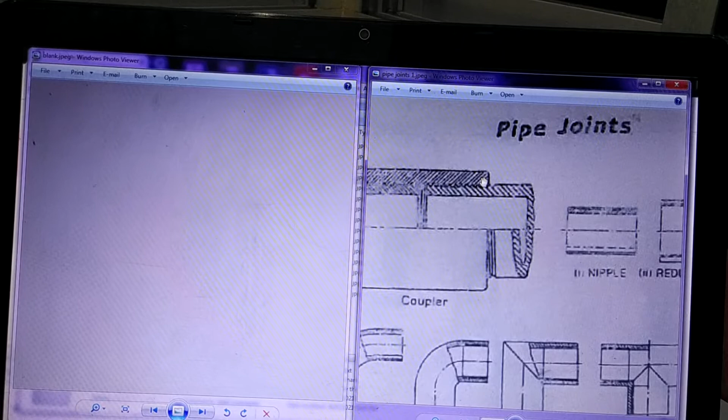Welcome everybody. Today's topic is pipe joints. It is freehand work. Today we are preparing freehand work on pipe joints, from practice sheet number 6.

Now let us see what these pipe joints are and what we are going to learn. There are different types of pipe joints shown, and we will see their function. You must have seen these many times, but today we will see what they are called and how they function. The main objective of these pipe joints is to connect two different pipes, and while connecting there are different situations.

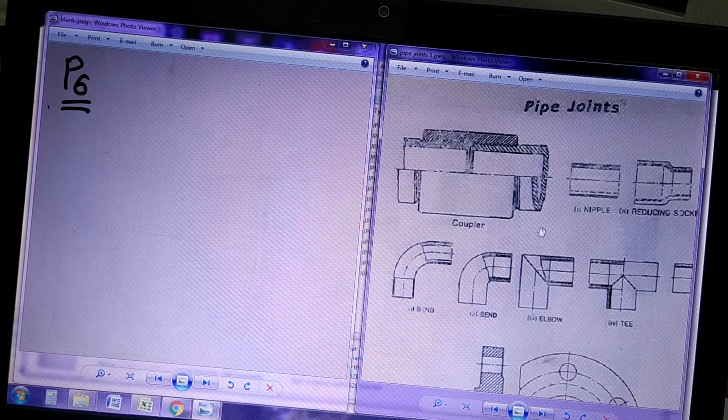These different situations are taken care of by different types of pipe joints. Sometimes two pipes are connected in a straight line just to extend the length. Sometimes two pipes are connected in a straight line but their sizes are different. Sometimes two pipes are connected at 90 degrees, forming a 90-degree angle. Sometimes the pipes are connected to form a T kind of joint, and so on.

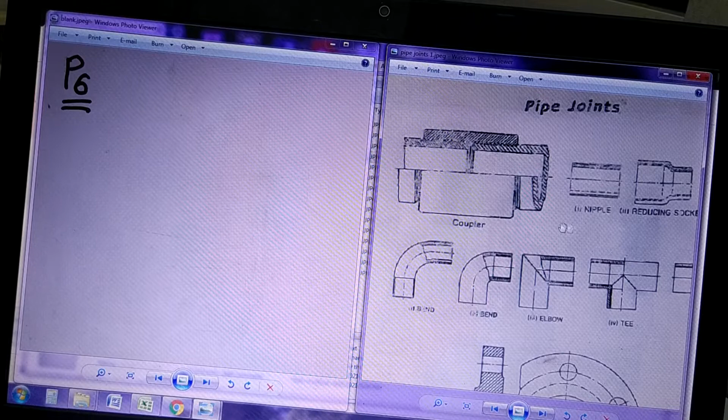So now let us see how this is done. These are simple pipe joints which you might come across in a domestic piping system. Now we start with the first one.

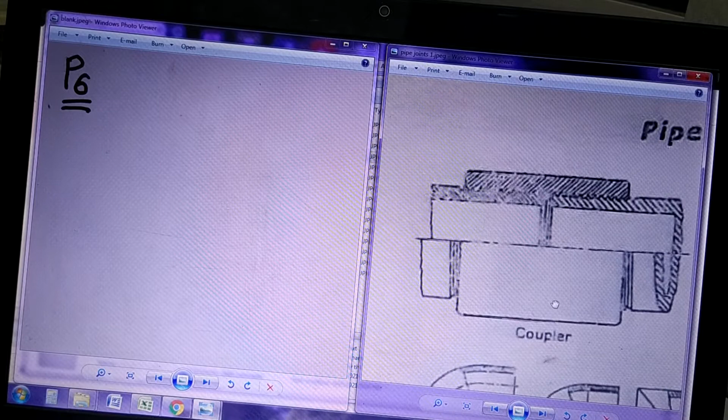This clarity is not there, but I will explain what it shows. It is shown in half section: the lower part below the center line is shown uncut, so that shows how it will be seen from outside. Then from inside, what you will see is shown here as a section.

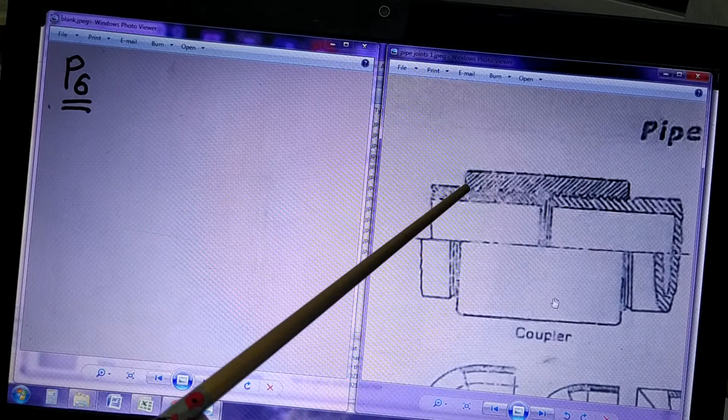Now how many parts are here? There are total 3 parts. This part is a pipe end coming from the left side; this is the end of the pipe, it ends here, and on this side it can be of any length. This is the second pipe, which ends here, and on this side it also has any length.

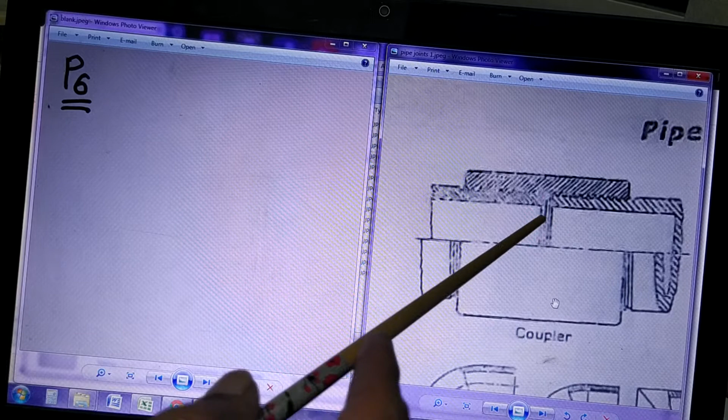Now these two pipe ends are brought together, brought near each other. As you can see clearly, because it is a section, the section lines are shown. You can also see the threading is shown here. Let me take it closer.

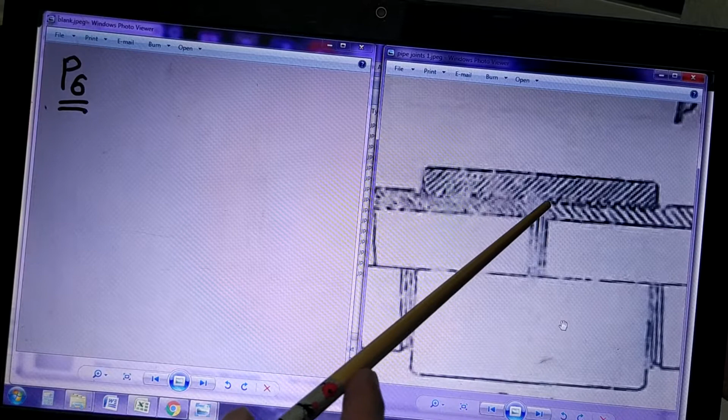The quality is not good, but follow my explanation to understand what it shows. This is the pipe diameter, and after that is the threading shown here till the end. Same thing on the other side - it's not clearly seen, but it is exactly the same, just the section lines are drawn of a different type. Again, this is a pipe of normal diameter, and after that there is threading.

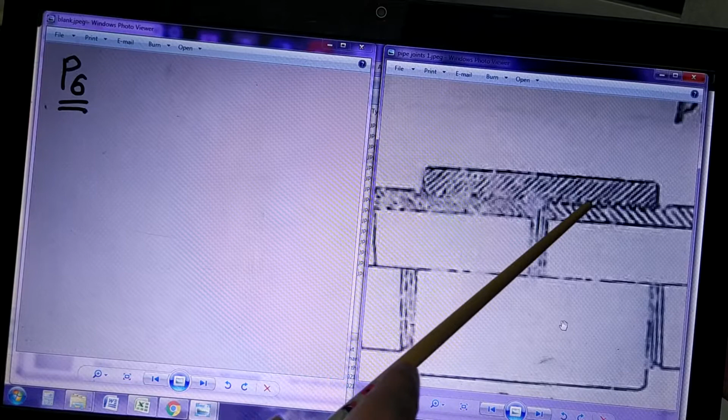Now these two threadings are of the same type, and they are from outside - they are called external threadings. This part is called a coupler, something like a hollow pipe. This coupler has threading from inside, and this internal threading engages with the external threading of this pipe. Same way, this part of the internal threading engages with the external threading of the other pipe. That means this internal threading is covering the external threadings of both pipes coming from the two sides.

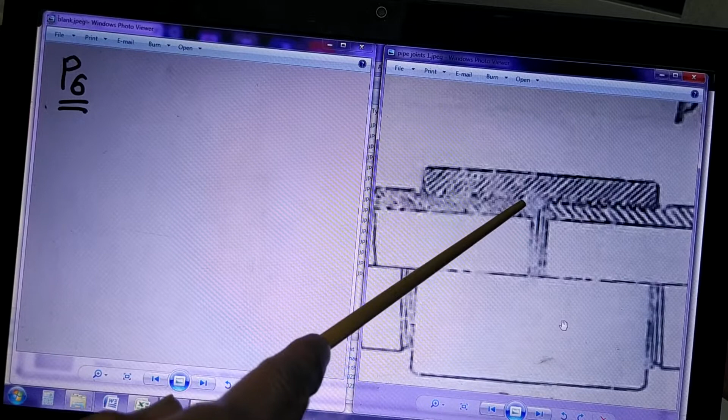So when you start rotating them, you will find that these pipes come closer to each other, and as a result a tight joint is formed. Sometimes between these two joints a gasket is put - some plastic or rubber gasket - to prevent leakage. Let me show you how it is shown.

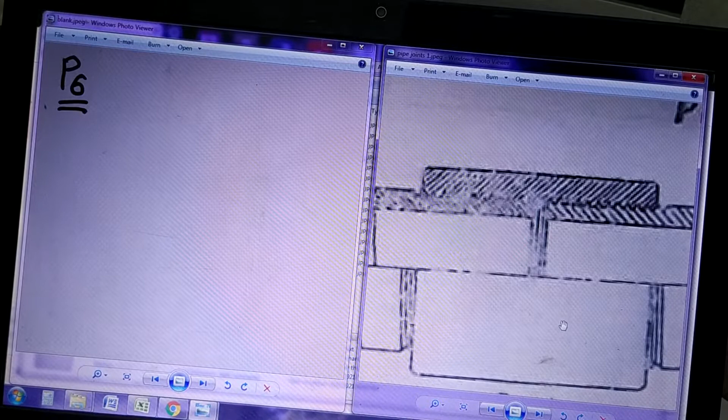This is one pipe, then this is the internal diameter, then there is a similar pipe on the other side, also with the internal diameter. So I have drawn two pipes. This is the center line, and I have drawn everything above the center line. Here you will find there is another part called a coupler, shown like this.

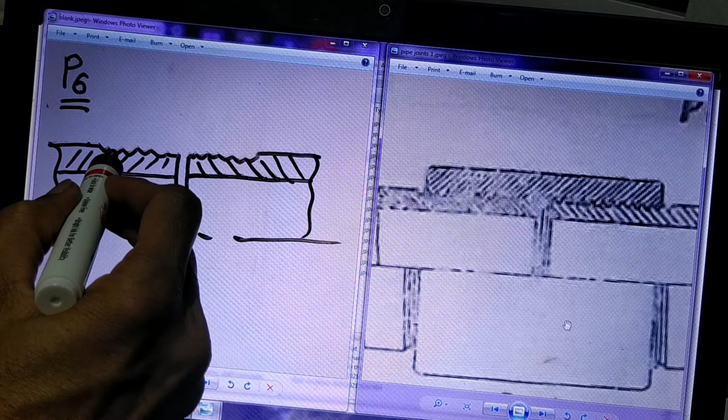It has got threading which is engaging with this threading. When you draw it, you show that it is matching - these serrations are matching. There is a section, and then between these two, at this place here...

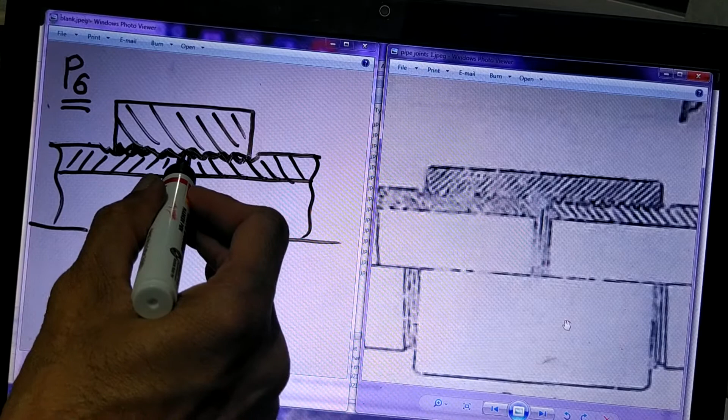Now what I have shown dark here is a rubber gasket. So when you are rotating this coupler, these threadings are brought together, and as a result the joint takes place when you rotate the coupler and rotate these ends of the pipe.

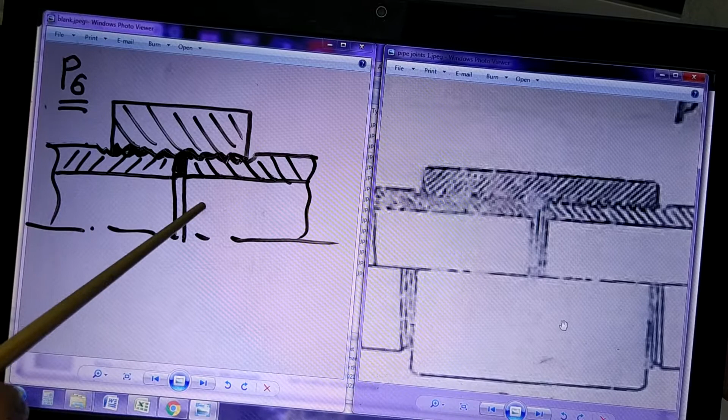That time the pipes move towards each other and they are pressing this rubber gasket, and the joint is formed. So this coupler, what is shown here, is called a coupler. It is working like this, and this is a figure which you can draw.

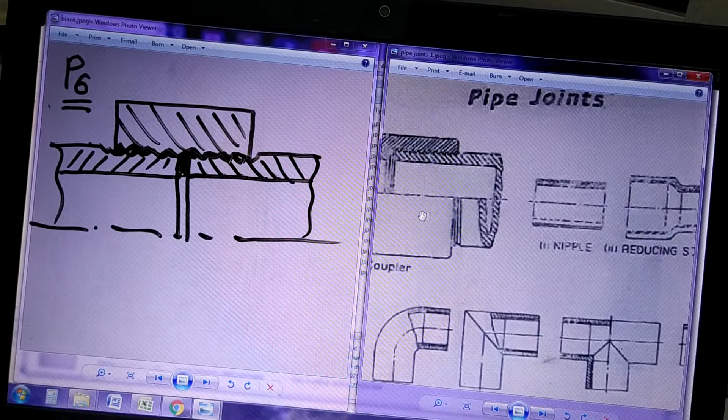Having seen this, a similar arrangement is done in different ways. The next part is called a nipple. This is a small piece of pipe only, used for connecting two pipes, but it remains inside the pipe. On this piece of pipe, the threading is on the outside.

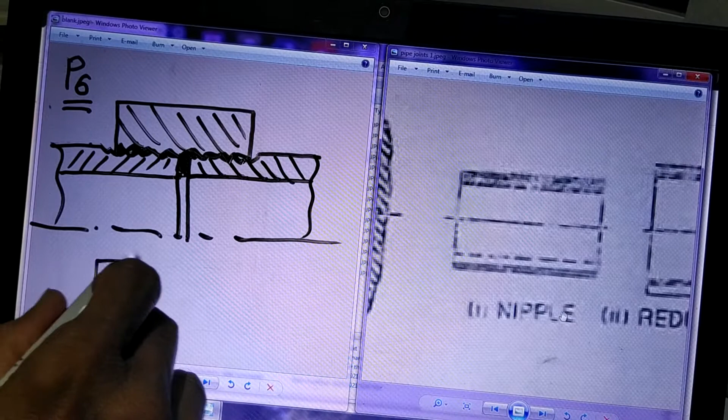So if I draw, this is a pipe and here there is threading, and this is a section of the pipe. Because it is a section, I have shown the section lines. So this is how the nipple is. The threading is on the outer side. This is a connector, just like a coupler - this is a nipple.

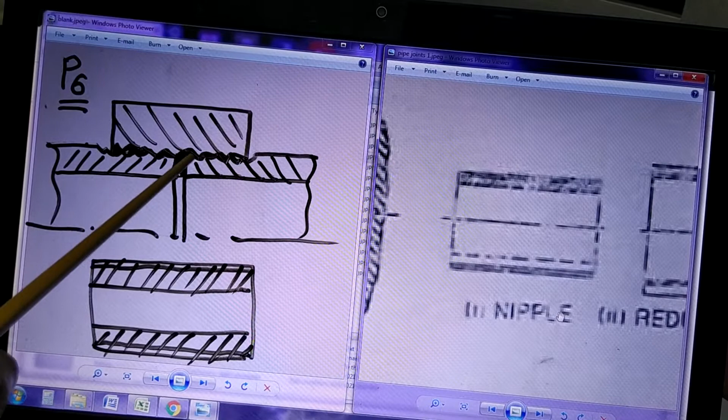Coupler and nipple are doing the same work - they are joining the two pipes. But in the case of a coupler, it is joining the two pipes from outside because it has threads from inside. Whereas the nipple is joining the two pipes from inside because it has threads on the outside.

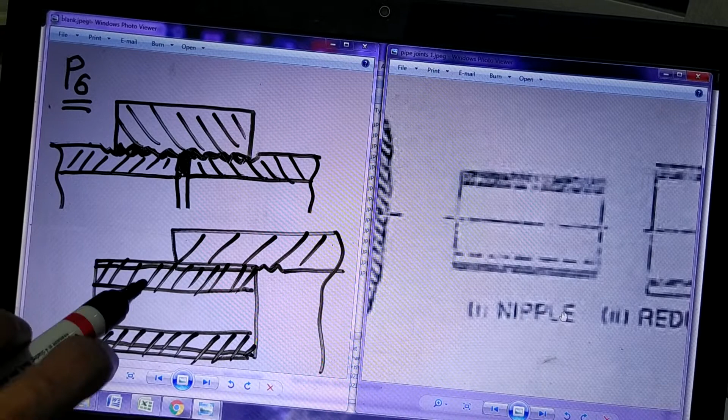So where is the pipe here? In this example, the pipe is from outside. Now what I have drawn is a pipe. This is one pipe, it has got internal threading. This internal threading is matching with this threading. Then on the other side, again there is a pipe.

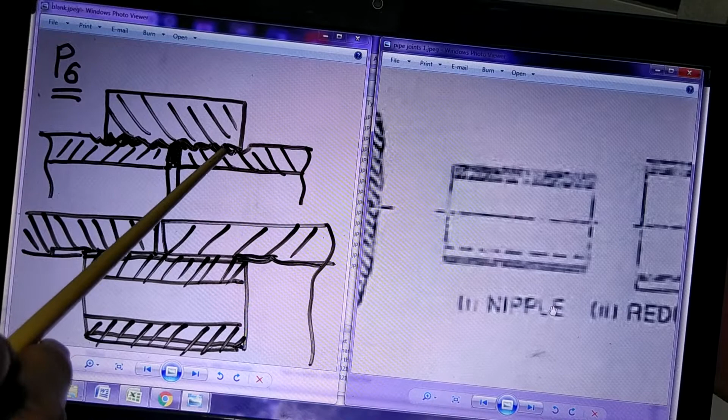Like this - in fact I should not show it like this, it is to be shown by double lines. See, this is one way of showing the threading. By actual convention, the serrations of the threading are shown like this. So this and this convention are different. Here the threading is shown by V-like shapes, but here it is shown by a double line - double line is the convention for showing threads.

Now this double line threading, for the nipple it is from outside, for the pipe it is from inside. One pipe, second pipe, and then the internal threading of the pipe is matching with the external threading of this nipple.

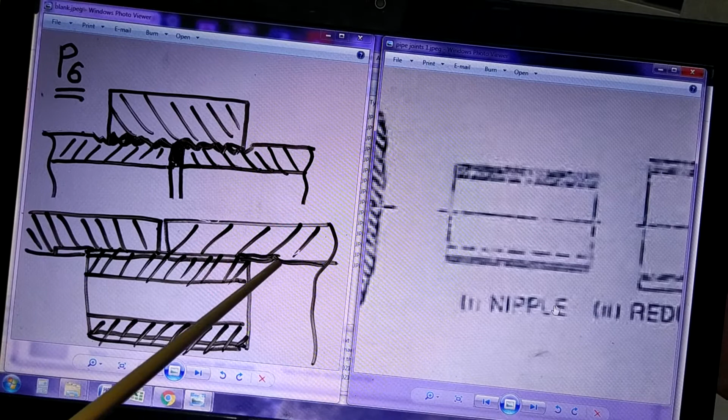Now in this case, outside the pipe there is no extra projection, it is all in one level, whereas here, inside, the flowing liquid has got an obstruction because of this nipple - because this is the original diameter of the pipe, and this is the diameter because of the nipple. So the liquid that is flowing has to get slightly diverted like this, and this is causing some kind of obstruction. So this could be a disadvantage, but the advantage is that from outside the two pipes are in one level.

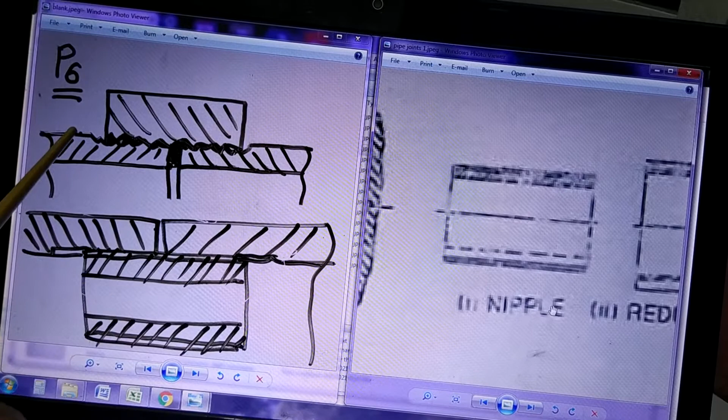Compared to here, where the coupler is there - the outline of the pipes gets disturbed and this extra projection is created on the outside. So sometimes this might be a problem, whereas this is a disadvantage here - the disadvantage is that it is obstructing the flow. So coupler here and nipple here, both are serving the same purpose of joining the two pipes.

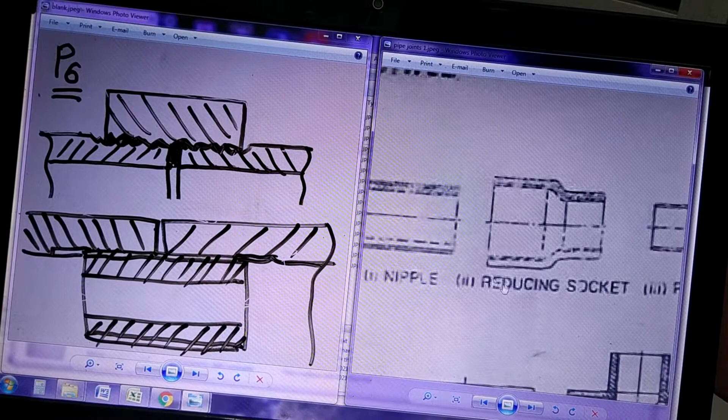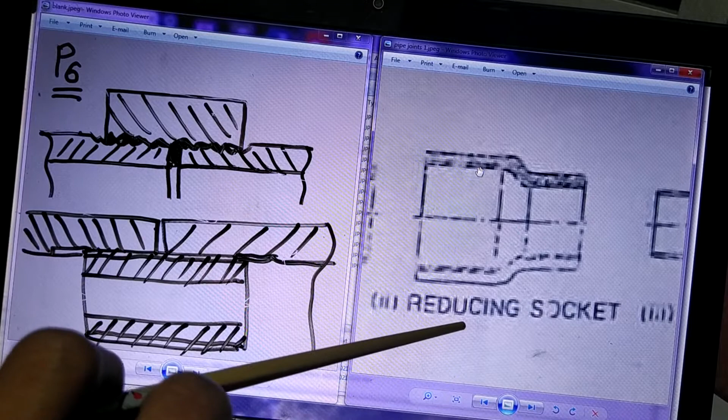Now you can see here again, there is a reducing socket, it is called. Here, the threading is from inside, and this again is a connector, so you can call this a kind of coupler only. This is a coupler, and this also is a coupler because it has got threading from inside. But the difference here is that it is called a reducing socket, not a coupler. Although it is a kind of coupler, it is called a socket - a reducing socket.

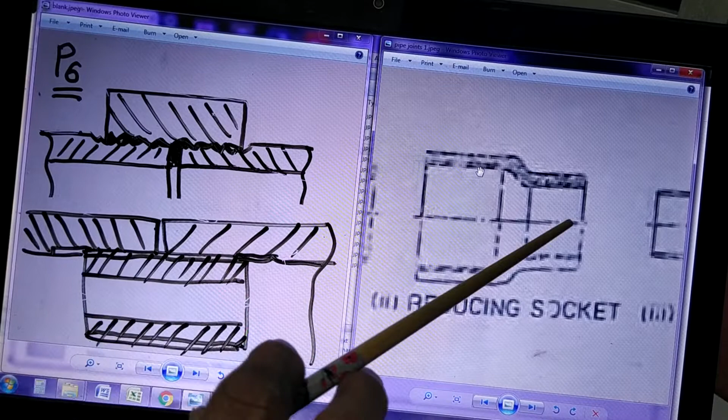Reducing means you can see here the diameter is different, here the diameter is different. That means the two pipes which you are connecting are going to be of different diameter. Here the two pipes are of same diameter. Here the two pipes which are going to be connected will be of different diameter. Now here the pipes are not shown, only the reducing socket is shown, and the internal threading is shown by double lines.

Now again the same thing, half shown. This half part is not shown in section, this part is shown in section. So because this is shown in section, when you draw it, something similar here. That means you are going to draw section lines here all over, and you are going to draw double lines at these two places. So double lines will end here, these double lines will end here. That's why this line has come.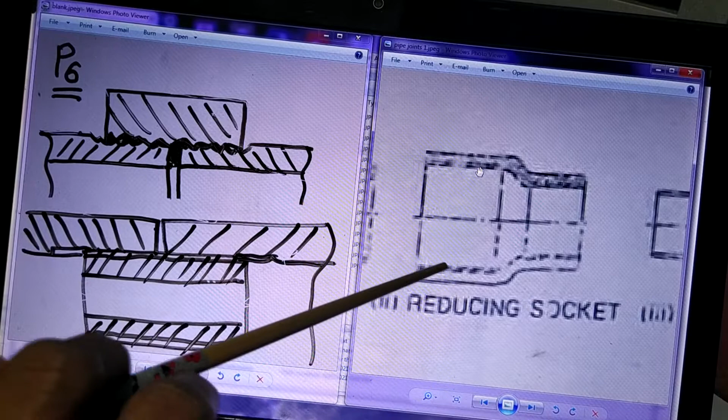And on this side, it is not shown in section. Instead of that, it is shown by dotted lines. So the double lines are shown by dotted lines like this. This is also shown by dotted lines, because this is not cut, this is cut. Only upper half is cut. So this is reducing socket used for connecting two pipes of different diameters. And it is connecting from outside. It has got threading from inside.

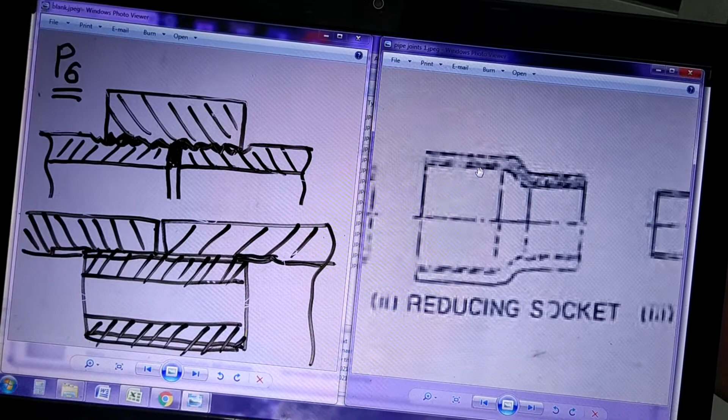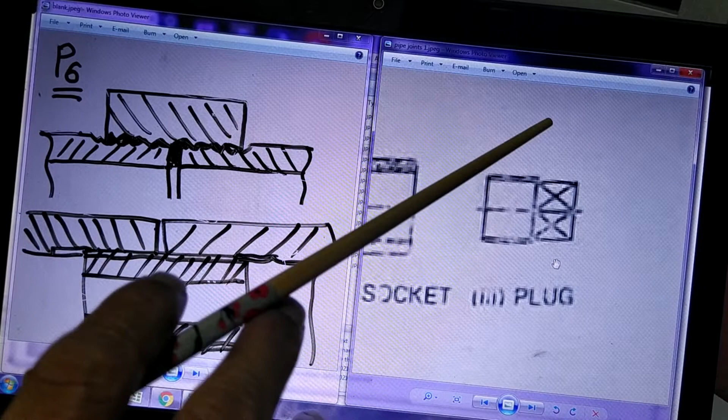Now the next part is called as a plug. This plug is a solid part. First of all, the meaning of plug is, it is for the purpose of blocking the pipe. Sometimes the pipe end is containing liquid, and we don't want that liquid to flow further away. We want the end of the pipe to be closed. So when you want to close the end of the pipe, this plug is used. As the name suggests, plug means it is plugging the pipe, it is blocking the pipe. It is stopping the liquid from flowing.

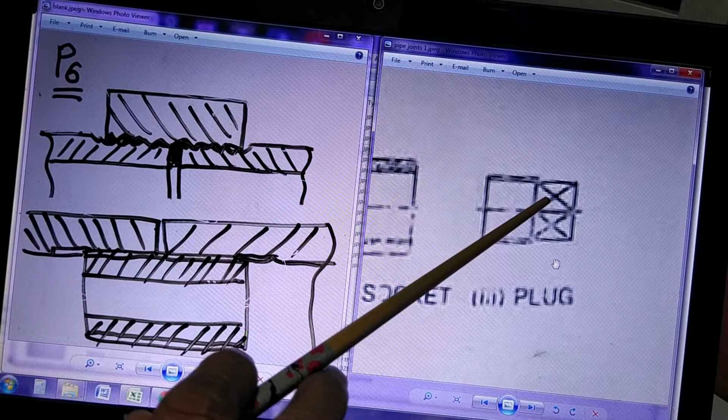So for this, again this is a solid part. This solid part has got threading from outside. You can see there are double lines here. These double lines mean that there is a threading from outside. And then here, these two cross conventions that are shown, two rectangles with a cross. This is a convention showing that this is a flat surface, and this also is a flat surface. So when there are two such flat surfaces, there are two more flat surfaces behind this.

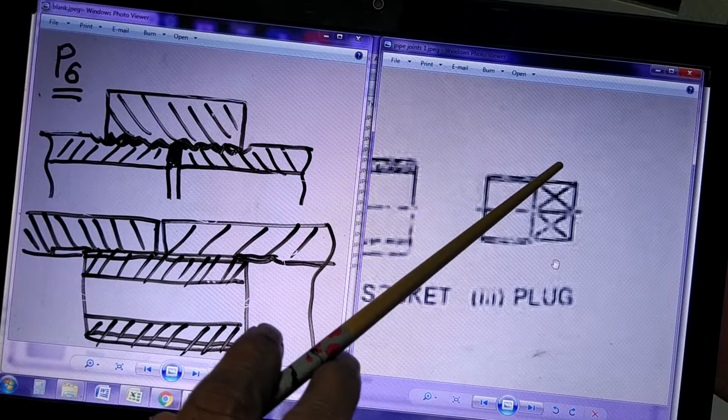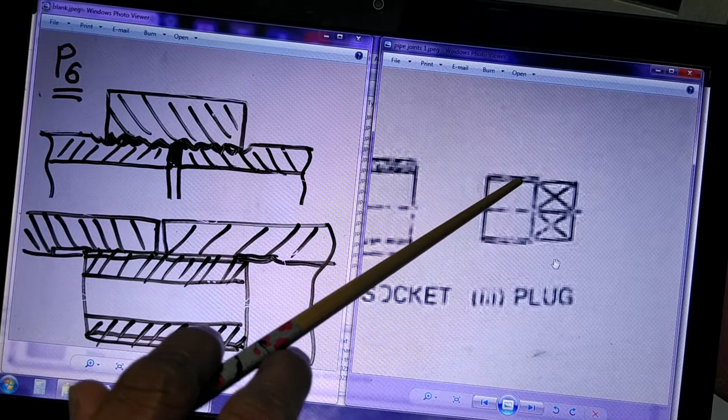So 2 and 2, 4 surfaces, they are forming a square. So what you see here is a side view of a square. That means if you take a section here, that section will be like a square. Or if you take a view from right hand side, you will see that it is a square. And this is a cylinder, and this cylinder has got a threading from outside. So because of outside threading, this will go inside a pipe. The pipe which you want to block will have threading from inside, and that inside threading will match with this threading. Okay, so let me just show you how it will look.

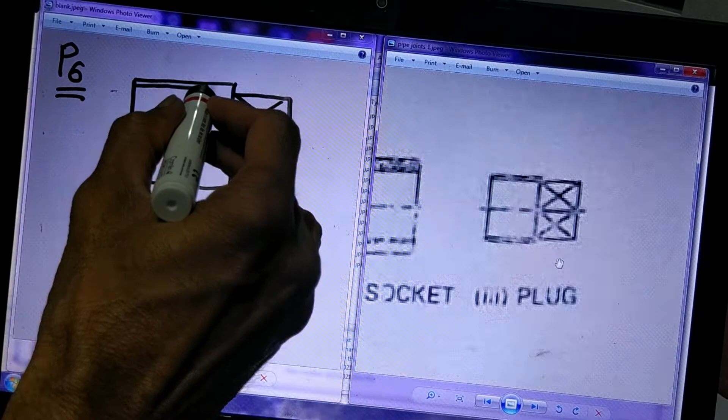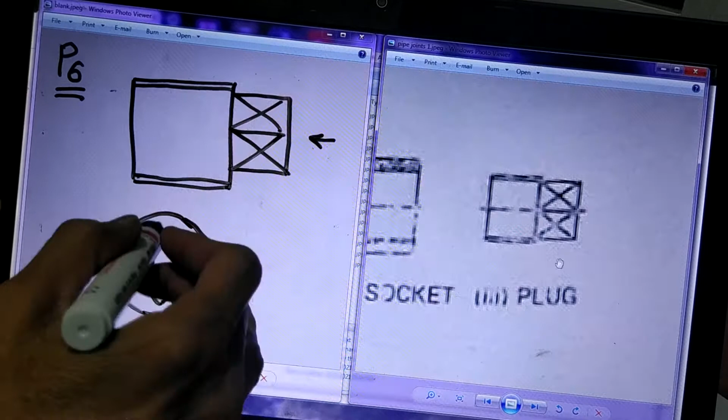Now these double lines are showing the threading, and this is a section. Now suppose I show the section, if I look in this direction to this part, then it will look like this. And then it will have a background of this one, which has got a threading. Like this. Now this is purposely drawn incomplete because threaded convention is like this, which we will learn after some time.

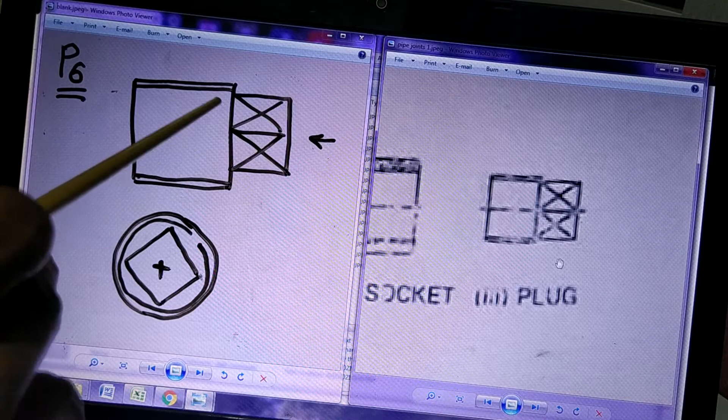So this square shape is used for the purpose of connecting the spanner. The spanner will be fitting across these flat surfaces, so that this entire plug you can rotate and fix with these threadings inside the threading of a pipe and block the pipe. That's why this is called as a plug.

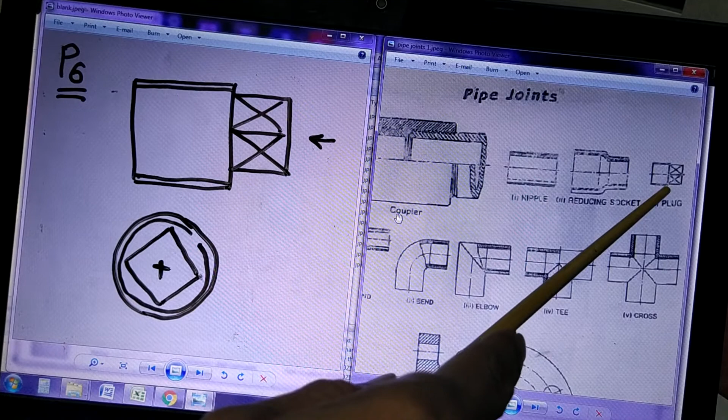So these three parts, and the fourth one, which is the coupler. So coupler, nipple, reducing socket and plug. We have seen these four parts. All of them are used for connecting the pipes, or here it is used for blocking the pipe. Now see the next set of things. You can see here, again there are pipe joints. They have got different names. We will see them one by one.

So this is called a bend. Now this is a long bend and this is a short bend. So the radius of curvature here is larger, here the radius is short, although the pipe size is same.

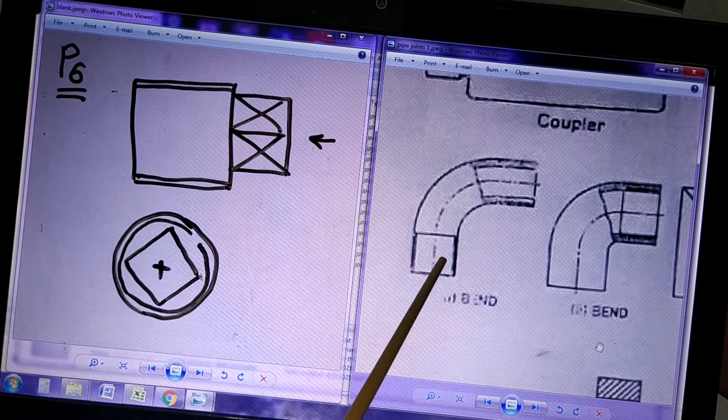Now what this shows is, here again there is a pipe which is bent like this, and if you can see, the clarity is not there, but what you can observe here is that there are double lines from outside, meaning that the threading is from outside. Here also threading is from outside. Here a section is shown, a partial section it is called. So the pipe is partially cut just to show you the internal details.

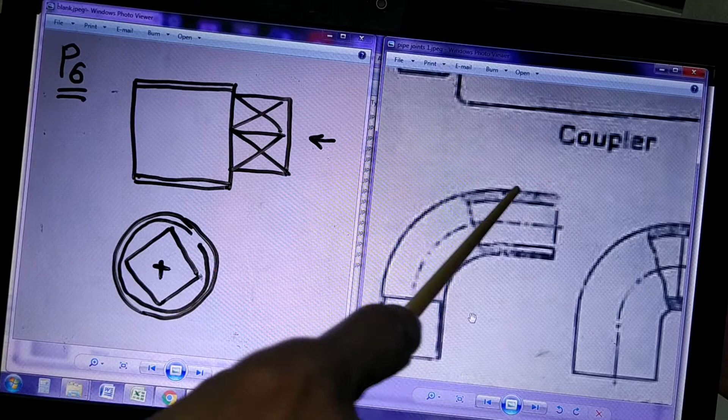And you can see this is the inside diameter of the pipe, which is not seen here because it is not cut. This is the outside view. So the partial section shows the inside view. So this is the internal diameter, and on the external diameter there are double lines which are representing threadings. So because the threadings are from outside, this particular end of the bend will get fitted to the pipe.

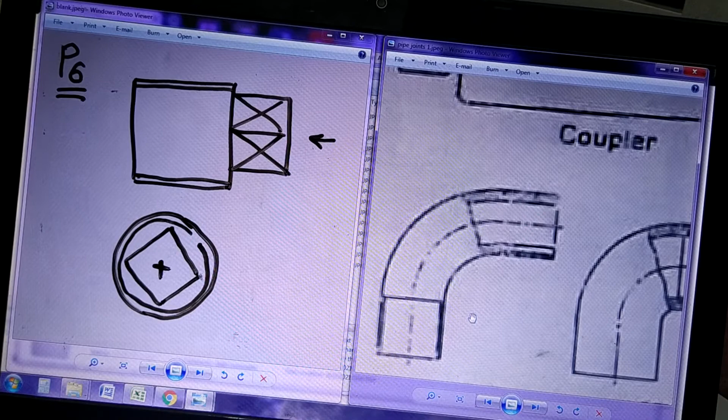So from this side the pipe will come, the end of the pipe will come up to here, and that end will have internal threading. That internal threading will match with this, and it will get connected. Same thing from the other side. So two pipes coming from two sides, one like this and one like this. These two pipes are joined to each other at 90 degrees by using this bend. So this part is called a bend, used for connecting two pipes at 90 degrees. Threading is from outside.

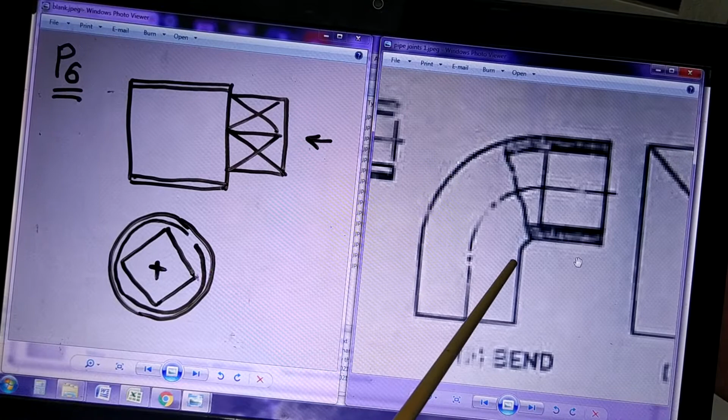Now you can see here again there is a bend. Now this time the type is different. The bend is a short bend. The curvature is like this, radius is less, and here the difference is there is threading from inside. You can see here the threading is from inside. So this will connect the pipes from outside.

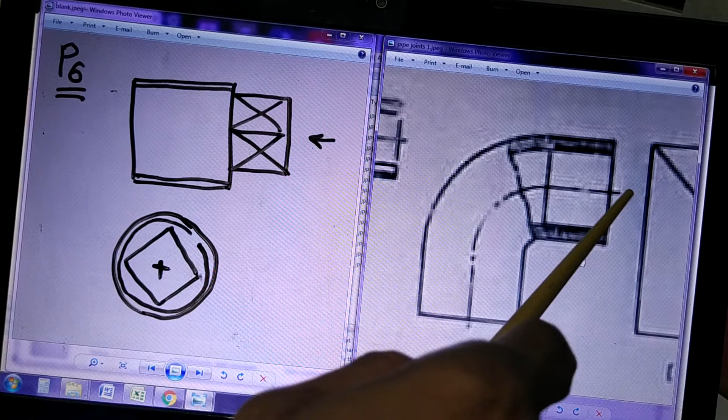So the pipe end will come here. That end of the pipe will have threading from outside. That outside threading will match with this. Same thing on the other side. And these two pipes, one coming from here, one coming from here, both these pipes will be joined by this bend from inside. The connection will be from inside, threading is from inside.

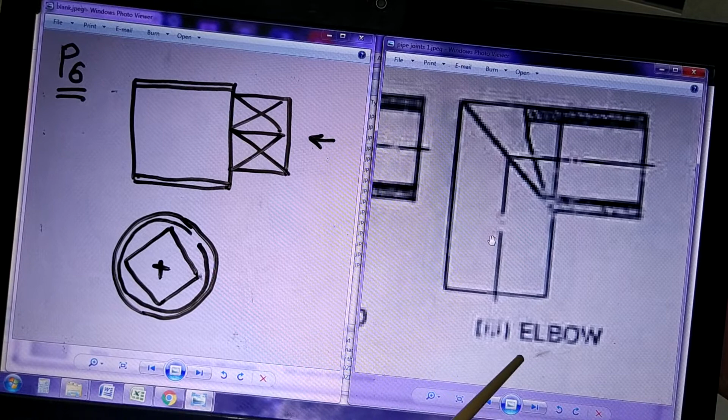Now next, this also is used for connecting two pipes at 90 degrees, but the name is elbow. The name is not bend, it is elbow, and the difference, as you can see here, is that it is forming a sharp 90 degree angle.

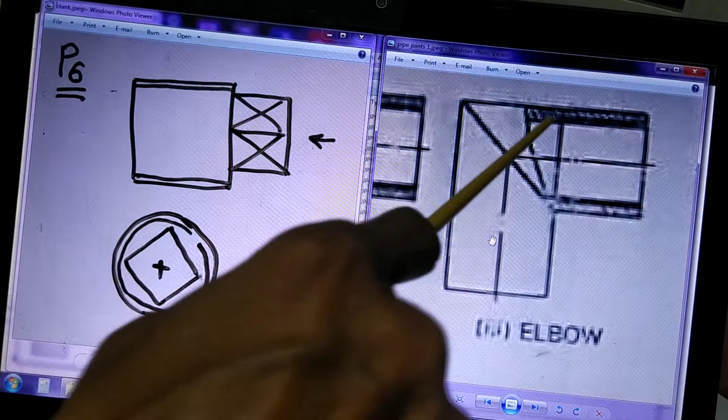So two pipes will come, one from here, one from here. The pipe will have threading from outside, and this elbow has got threading from inside. So the pipe will be fitted inside, and here also inside, by making use of this threading, and the joint is formed. The only difference is here it is at 90 degrees, whereas in the earlier case there was a curvature. So as you can see here there is a curvature, and here there is a sharp 90 degree bend. It is called an elbow.

Now this is another type. This is called a T-joint. Now as you can see clearly here, a T-joint is used for connecting three pipes. So one pipe comes from here, the second pipe comes from here, and the third pipe comes from here. So three such pipes are connected to each other, and as you can see again here, the left half is shown in section.

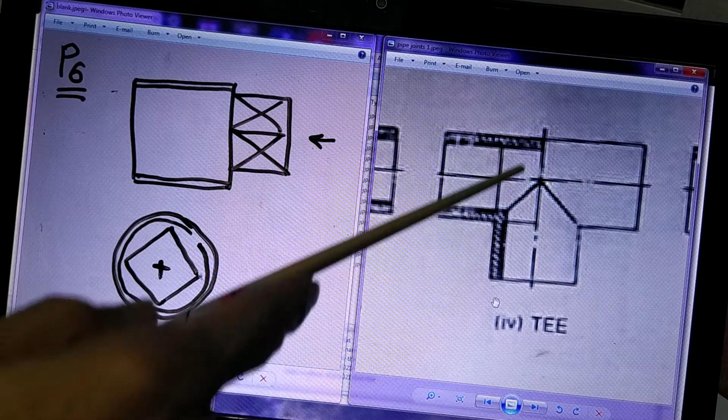So it shows that this is the thickness of this joint, and then the double lines are from inside, double lines from inside, double lines from inside. This is where the double lines end. From this side the double lines will end here, that's why this line has come. So because the double lines are from inside, that means the threading is from inside.

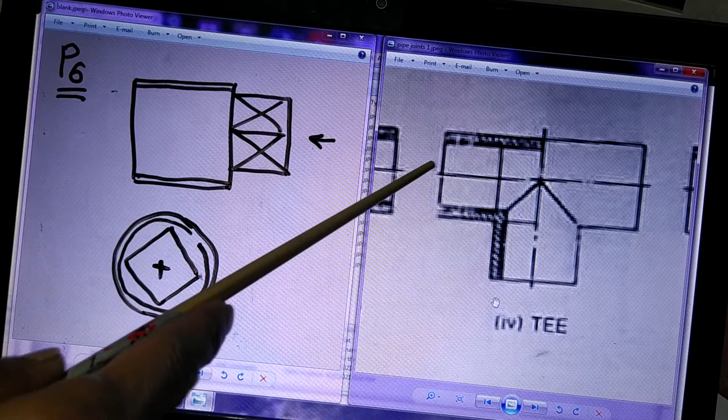So one pipe comes from here, that pipe will have threading from outside, and that outside threading will be matched with the internal threading. So this pipe will get engaged on this threading, and one more pipe coming from this side will get engaged into the threading. Now that is not seen because this side is not shown in section, only the left side is shown in section. So like this, a T-joint is used for connecting three pipes at a time.

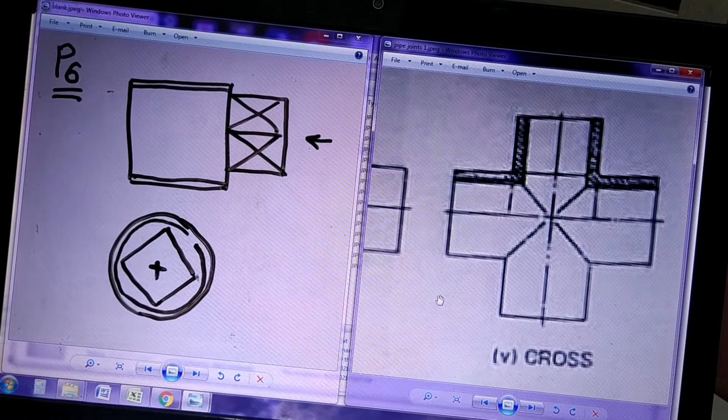Now exactly the same thing here, but the difference is it is called a cross, and it is forming a cross joint. So now here there are four pipes coming at one place. Four pipes coming from four directions are connected here, and the cross has got threading again from inside. So the pipes will have threading from outside, and they will get connected by these threadings. So that is called a cross joint.

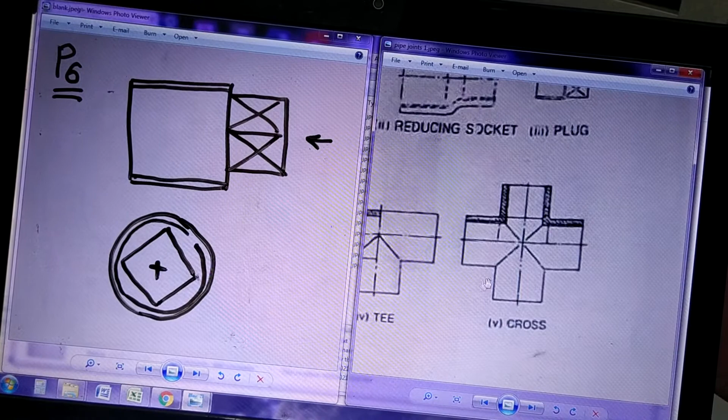So let's see what we have learned just now. As you can see here, we have learned five types of joints. First is a long bend, second is a short bend, then there is an elbow, then there is a T, and then there is a cross. Cross is for four pipe connection, T is for three pipes connection, elbow is two pipes connected at 90 degrees. This short bend is again connecting two pipes at 90 degrees.

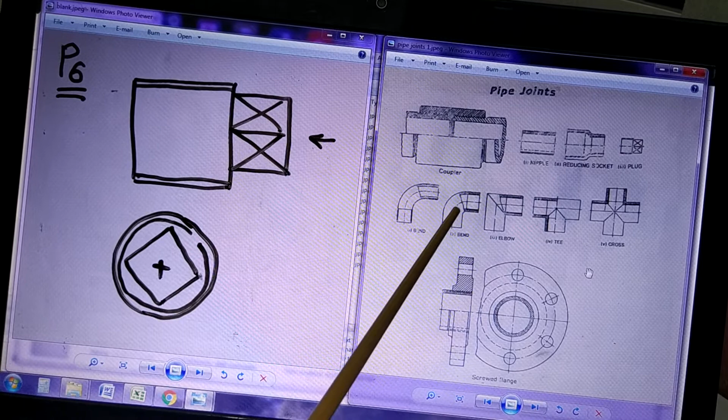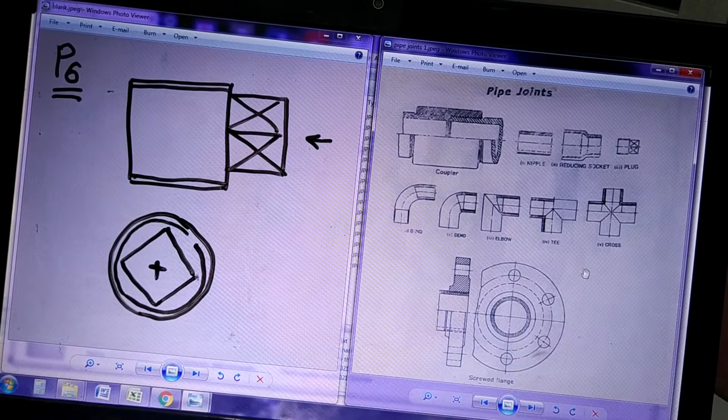All these four have got threading from inside, and this is from outside. Pipe has got external threading, this has got internal threading, and this long bend is the one which has got threading from outside. Okay, so we have seen these many things which are used as pipe joints for fitting different types of pipes. Now having seen this, let's see one more type of pipe joint.

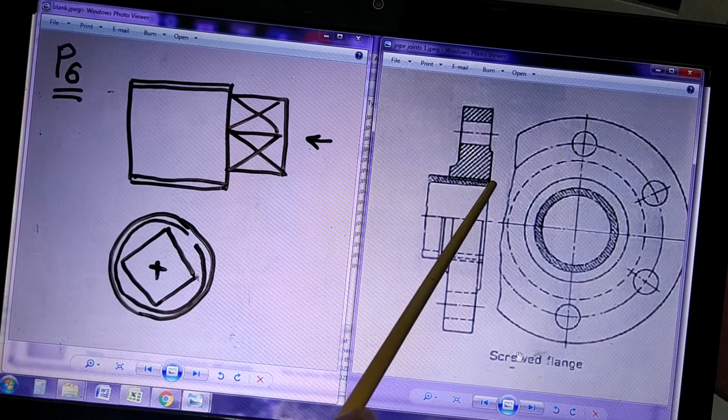This is called a screwed flange. That means the joint is formed by making use of a flange. So as you can see how this is made here. What is shown here is a pipe. This part is a pipe. This is the end of the pipe, and here it is shown incomplete. That means this can be of any length on this side. Only the end is shown. Now this end of the pipe has got threading from outside. So here there is a threading.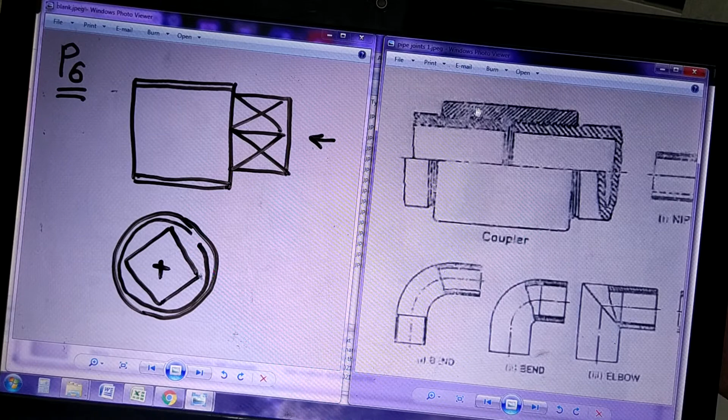So last time we have seen some such coupler. Since this has got threading from outside, this coupler which has got threading from inside can be fitted here. So that coupler can come and fit here, and one more similar pipe will come from the other side that can be connected. But here the process is different. Here it is not connected by coupler. The pipe is connected by this kind of a disc.

Now this disc is called a flange, and as you can see here, it is called a screwed flange, meaning that this is some kind of a disc that is taken. This disc has got threading from inside, so that internal threading is fitted on this external threading of the end of the pipe, and then this disc has got holes like this. As you can see, 1, 2, 3, 4, 5, 6, it is shown partially cut, and these 6 holes will be connected with similar 6 holes on the other side.

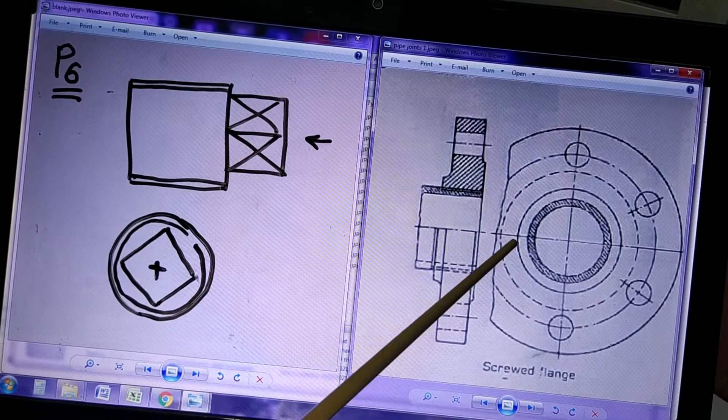So exactly the same thing will be there on the other side. There will be a pipe coming from this side that also will have similar threading, and that also will have a similar flange on the outside. So two such flanges, when they are brought in front of each other, will touch each other at this place. Between these two there will be one gasket placed, and then connecting these two flanges is done by these holes which are there.

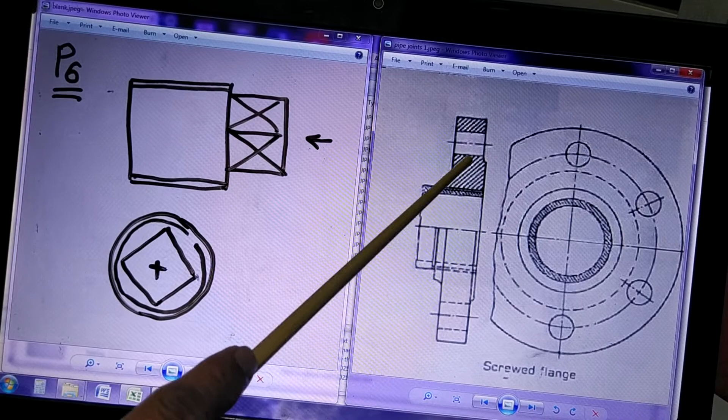Through these holes nut bolts will be passed, and with the help of nut bolts two such flanges will be connected to each other with a gasket in between. So as a result the joining will take place. Now let's see how this is done.

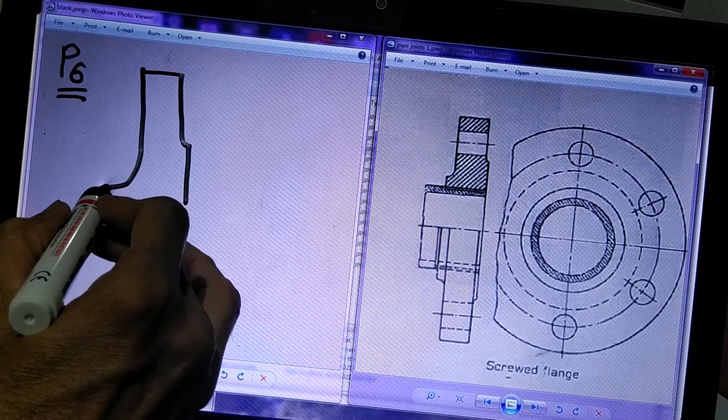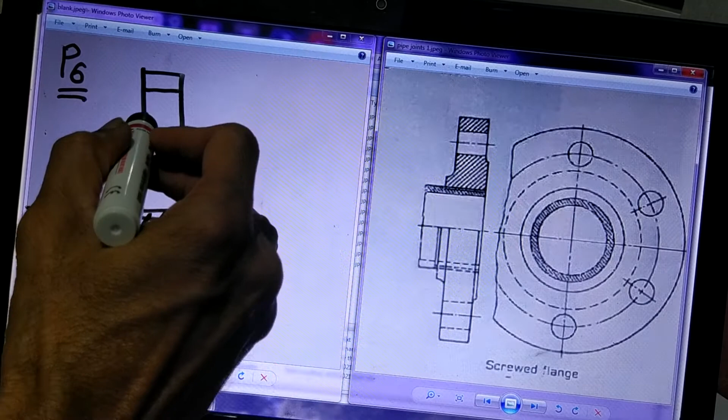Okay, so I have shown this pipe on one side, threading continues and then goes away. So I have shown one pipe, and then I have shown also the flange. This is a hole here. Now exactly the same thing will be there on the other side, and here in between the two, this black thing I am showing is a gasket. Okay, and then this is another flange of the other side. I am drawing exactly the same mirror image.